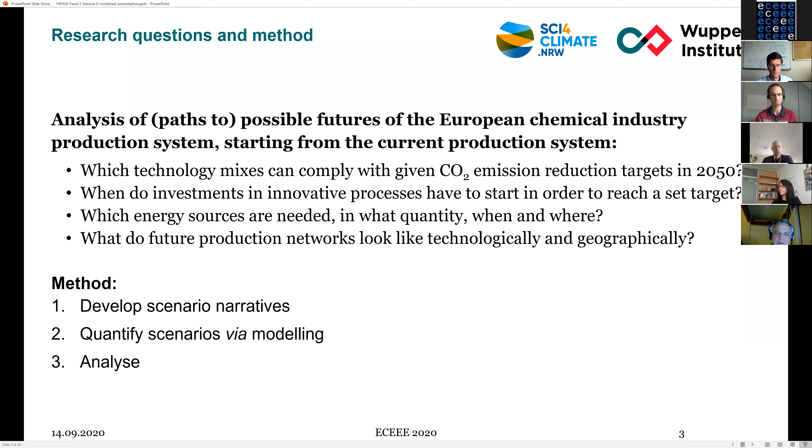So you should see my third slide now. Do you? Yes. Yeah, okay. So this is our modeling framework.

In the big box in the middle is our model, consisting of three modules. This model is fed from the left by our scenario assumptions. We develop scenario narratives with some assumptions in the paper, based on the IPCC SSP2 scenarios. We also input data from our industry database, which has a highly detailed geographical level of information on the plants in Europe, what technology they use, how old they are, their capacity, and so on. So this goes into the model.

The first module is a stock dynamics model that, based on the assumptions for the scenarios, generates the future demand for plastics and the future plastic waste generation.

This, in turn, is an input for the second module, the invest module. It's a linear optimization model that, based on future demand for plastics and the technology parameters, decides when and where to invest or retrofit technologies to meet the demand while minimizing costs, given constraints on CO2 emissions, for example.

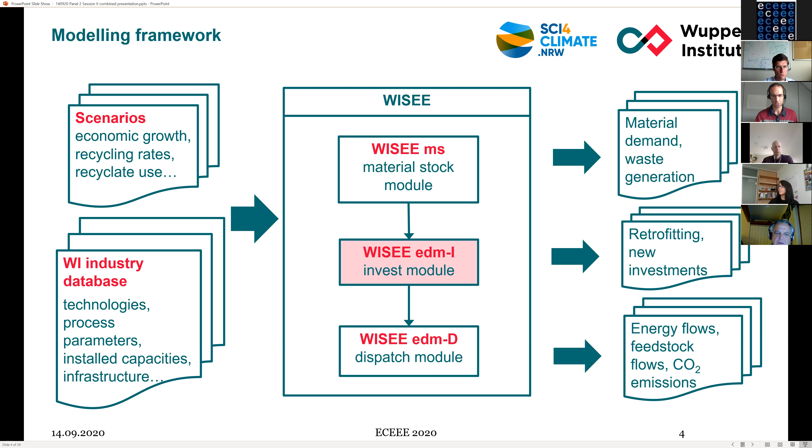The next slide, I guess you will see it before I can see it. It shows how some of the routes, the chemical production routes, are represented in the model. You still don't see the slide, I guess. We can see the HVC production route. Okay, you can see it. Okay, great, thank you.

In green on this slide, the name of the technologies and the products are the existing technologies already installed in Europe that we have in the database. From the left, the refineries produce feedstock, naphtha, that is then used in steam crackers to produce the platform chemicals, the olefins and aromatics, or you import from terminals at coastal sites naphtha, ethane, propane, and you can use them in steam crackers or in propane dehydrogenation, for instance. These kinds of routes are implemented in the model.

The red products and red technologies are future technologies that the model might decide to implement to reach carbon neutrality. Instead of importing naphtha, we might import green, climate-neutral naphtha from overseas, and then use it in steam crackers. We might use plastic waste, put it through pyrolysis, and generate naphtha, ethane, and gas oil that can also be used in steam crackers. Or we might go a totally different route with another new feedstock, methanol, from plastic waste, for instance, with gasification, and then from the syngas you produce methanol. Same thing with biomass, and then from this methanol you need a new route, the MTO, methanol to olefins, or methanol to aromatics. All of those platform chemicals then go into the polymerization to produce the polymers.

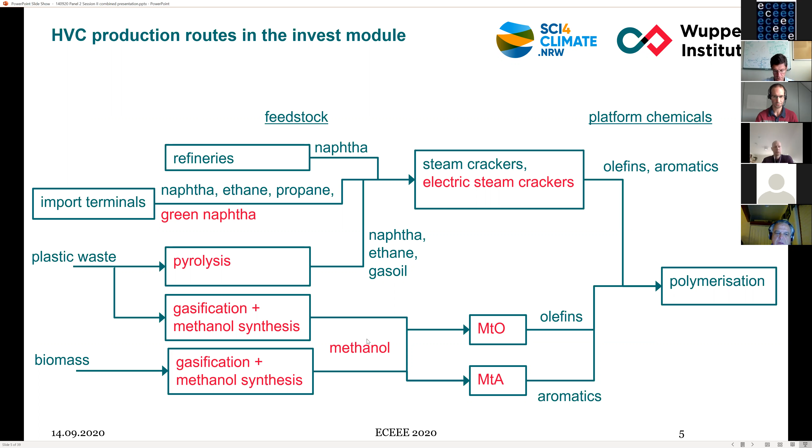So as I said, it's a geographically detailed model.

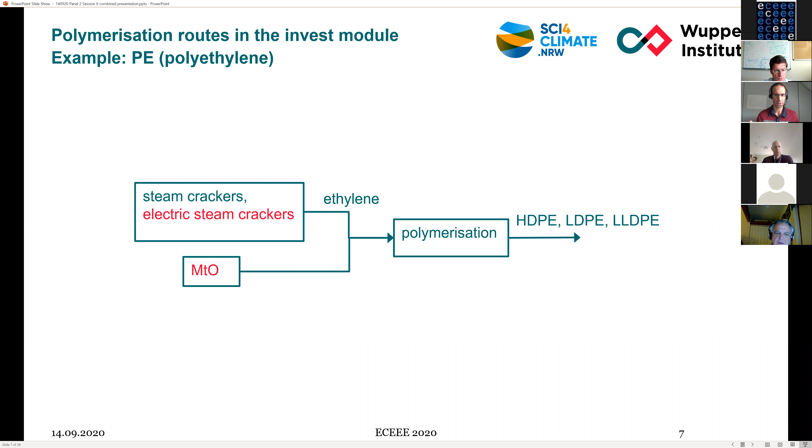Going to the next slide. So we talked about the feedstock and the platform chemicals - this is going into polymerization. The next slide is a very simple polymerization route from ethylene, one of the olefins, producing 3 types of polyethylene. That's a simple one, also implemented in the model.

We have 15 different polymers in the model, something like 57 different products, and you will see why in the next slide when it comes up. It's another polymerization route for another polymer called ABS.

So I can't see the slide yet. I don't know if you can see it, but you will see that the route is much more complicated than for polyethylene. You have a lot more intermediary steps - you need more products, intermediary products, until you get your polymer.

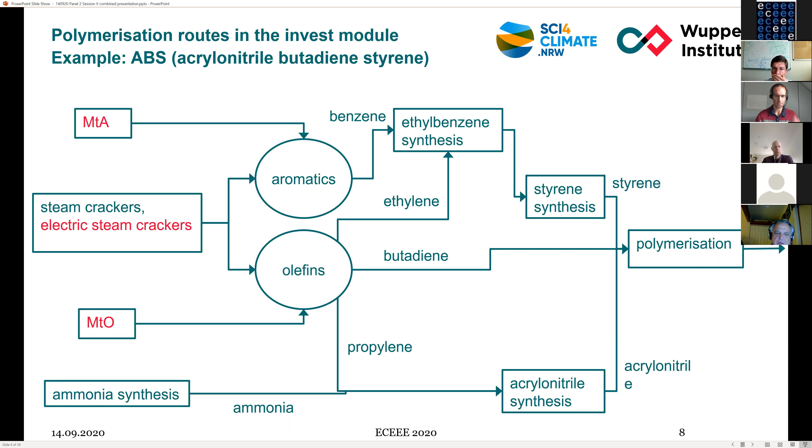And as you saw on the maps before, those different plants are not necessarily at the same place. Along this chain, you might have to transport the products from one place to the other. So that's the next feature of this model. Moving on to the next slide, it should show 4 small maps.

These are close-up looks, kind of zoomed in on the region around Rotterdam and Antwerp, and the Rhine and Ruhr region in Western Germany, around Cologne and the region where I'm sitting right now. I can't see the slide - now I can see it.

The 2 maps at the top show you the naphtha pipelines. In yellow is the capacity of the pipelines, and if the pipeline is used, it's gray. On the top left, you have in 2030, naphtha being imported from Rotterdam and flowing to Cologne, and then flowing up to the Ruhr area.

In 2050, it looks a bit different. Now you're importing green naphtha, climate neutral naphtha, from Rotterdam to Cologne also. It's not going up anymore to the Ruhr area - they changed their production processes. But now it's also flowing down towards Ludwigshafen, a bit further south in Germany.

It wasn't the case in 2030 because they had their own refinery in the region there. In 2050, the refinery is out - it's not working in a climate neutral scenario. So they import green naphtha.

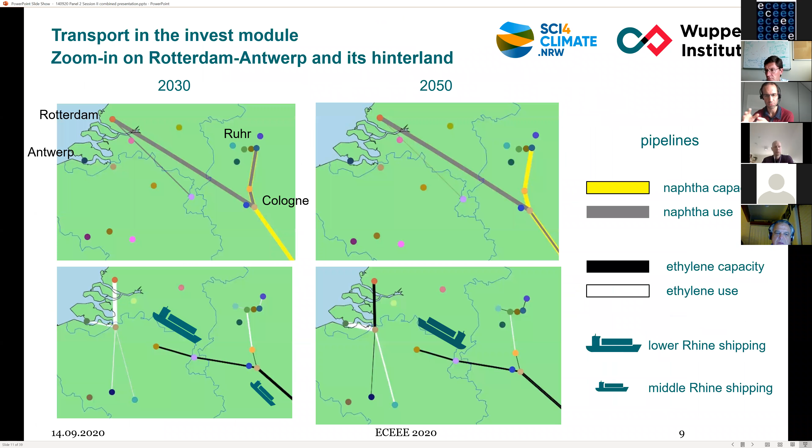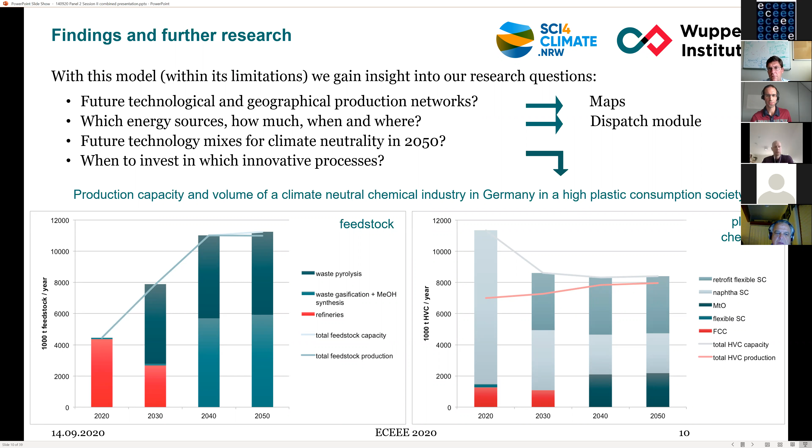So that's the kind of analysis we can do. There's more in the paper, and that was the end of the presentation. Thank you for listening.

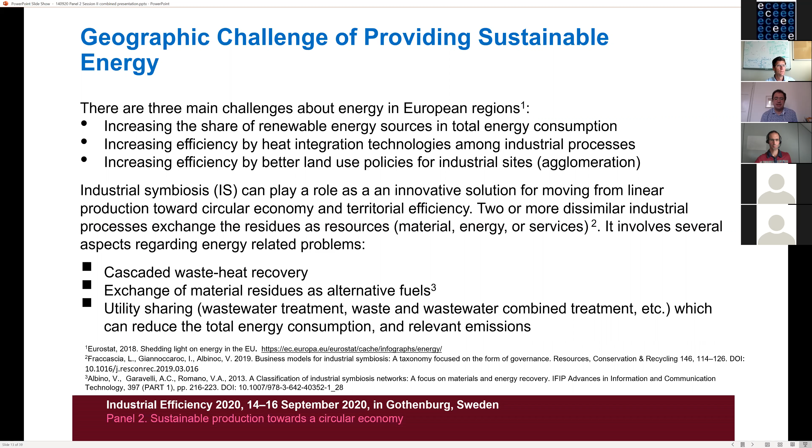But the question would be then, in which manner this work would be more effective? If it would be in individual collaborations, or if it would be scaled up into networks, let's say.

In order to have these networks, we should remember that industrial... not only, but also it's about companies from different sectors that normally don't know each other. So when we speak about scaling up, it seems that it would be more complicated for a network of many different actors. Therefore, we will need some sort of support from outside the network, which is usually referred to in literature as facilitation. The structure of this type of regional collaboration is usually referred to as ISN, or industrial symbiosis network, in order to be distinguishable from individual collaboration.

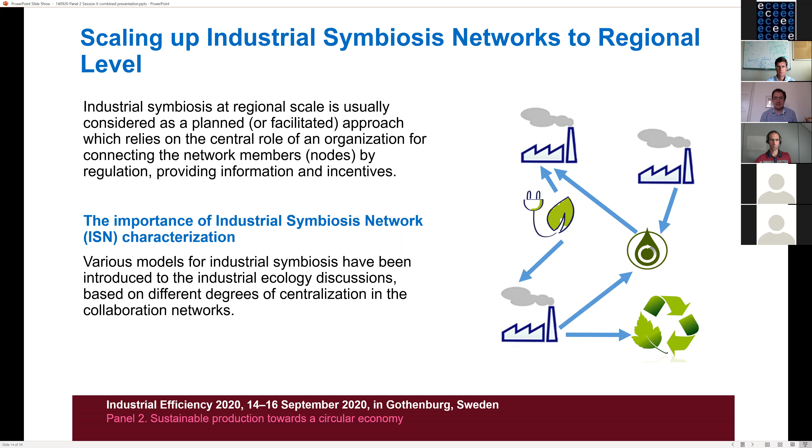At regional level, the network may also include not only manufacturing firms, but also other businesses such as waste treatment businesses or also public facilities.

This complicated structure should be somehow measured. We will need indicators not only for measuring the efficiency of a network, but also for designing future tools.

Social network analysis, as I said, this process is not only about technological aspects. For technological aspects, there are already developed tools such as input-output analysis, material flow analysis, and analysis for considering the reduction in emissions, the efficiency of network in this way. But the structure of networks, the role of different actors, different influential players in this network is also very important.

Social network analysis is a method based on graph theory, which is a quantitative method for measuring the behavior of a complicated structure, let's say a network. It's very normal to show the network as a graph with circles, which are the players or actors in the network, and the relation which is shown by lines.

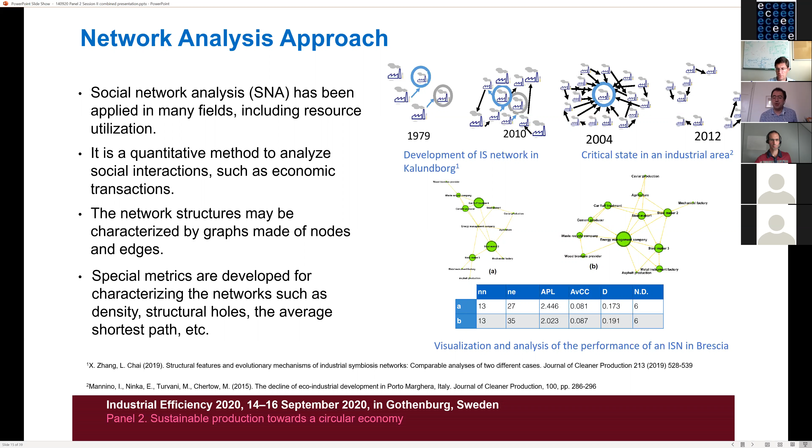Networks and the statistical data which are calculated based on this method. There are different indicators such as betweenness centrality, density, and the average shortest path, which are shown here.

For example, for density, we can see that network A has less density than network B, which is due to the fact that there is a very big influential actor in network B, which provides a shorter path, a shorter relation between the actors.

But as we saw in the image on top, there is a risk for the sustainability of the network, which is very dependent on the influential player, or central actors, which are very centralized, let's say.

For measuring this industrial symbiosis network from an internal point of view, social network analysis is a very good method, but we also need to evaluate the effect of geo-context and the behavior and efficiency of the network. Different aspects should be considered.

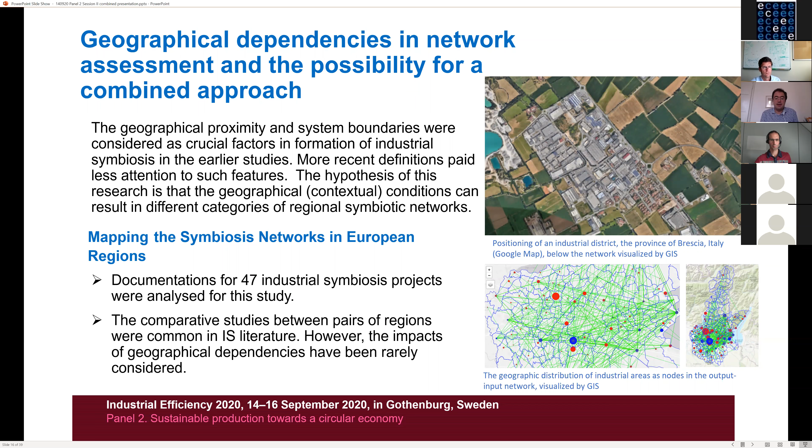They are not exactly networks at regional level, but they are large networks. Some of them even are eco-industrial parks, but scaled up and outside their boundaries.

Sorry, I'm trying to go to the next slide.

We detected three main network structures in the studied regions.

First of all, there is the centralized closed system. In case of energy, this type of network is a network with a central provider of energy or a shared utility, which is, of course, very normal in eco-industrial parks. Then we have the scattered pairs of firms.

They are individual firms in isolated regions, which through exchange of some type of waste are connected to each other in order to make a weak regional network. And finally, we have the semi-centralized, or more open system, which is the most expanded system, or let's say an image for the future ideal type of industrial symbiosis network.

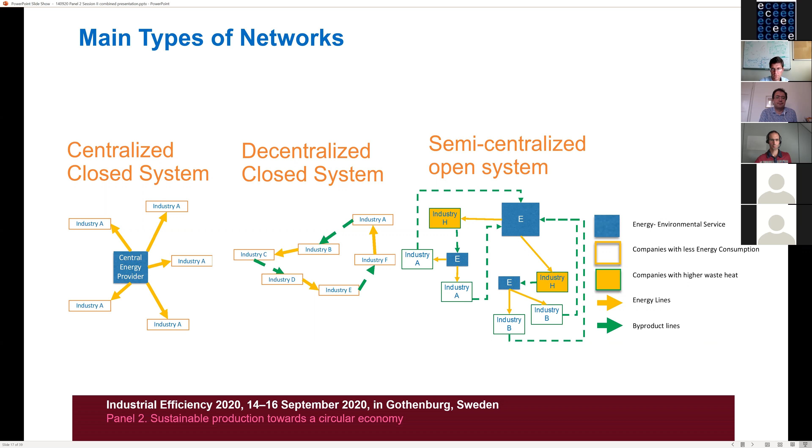This shows how these different types of networks depend on their context.

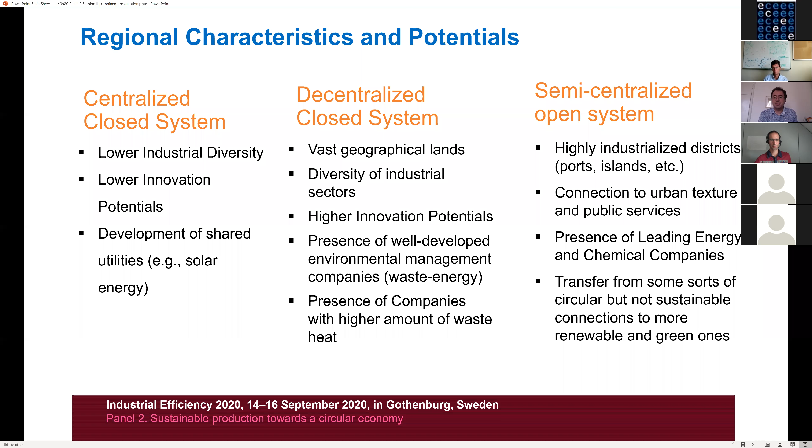However, we also found out that one of the other important characteristics which can compete with physical geography is the existence of innovation poles, or research centers, in these regions, which in some cases may lead to overcoming limitations of natural resources or contextual properties.

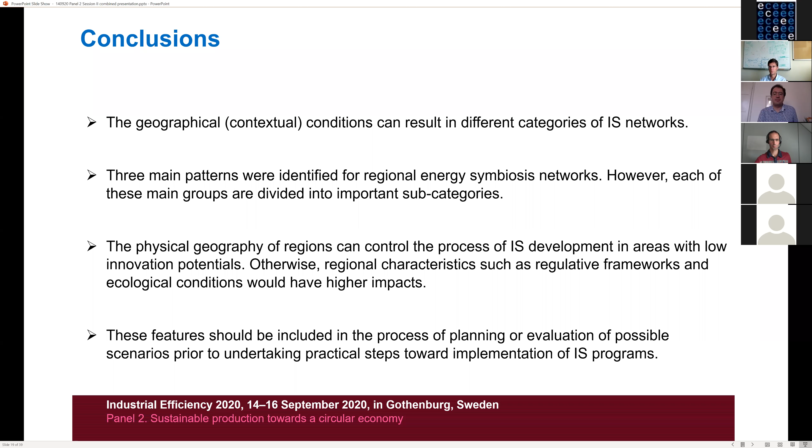The data that we used are mostly from open source data. We have detailed data from the context of Italy, and so we are open for collaborations, especially from outside Italy, to continue this study.

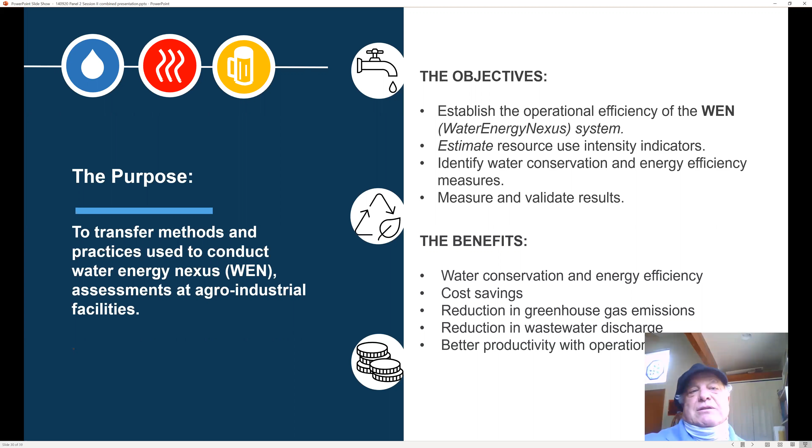The following slides will provide a description of the methods we use to conduct a materials and energy flow analysis, using engineering protocols developed by the American Society of Mechanical Engineers and the U.S. Department of Energy, providing analytical tools to conduct industrial energy system assessments.

The water energy assessment model integrates the MEF systems with these protocols in order to establish the operational efficiency of the energy assets engaged in beer production, which is our case study for today, where we analyze the steam systems, water pumps, air compressors, refrigeration systems, and fans in order to establish metrics that allow us to determine the water energy intensity of the facility and per unit operation.

These indicators provide us with baseline conditions. They allow us to identify water and energy conservation measures. They give us a foundation to calculate costs and benefits, and then allow us to compare, measure, and validate results.

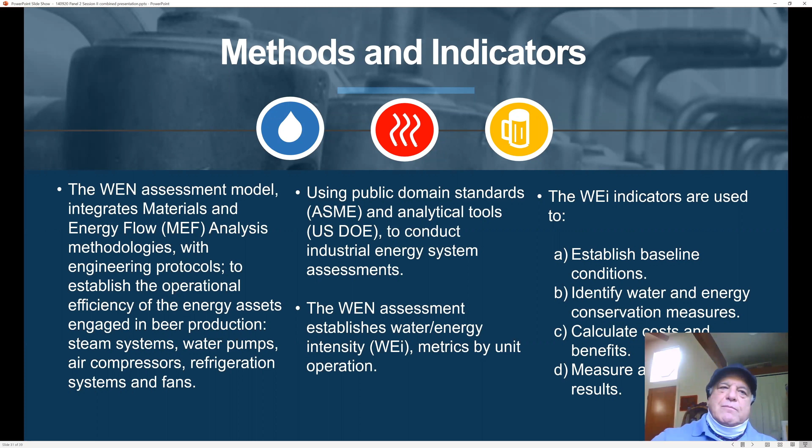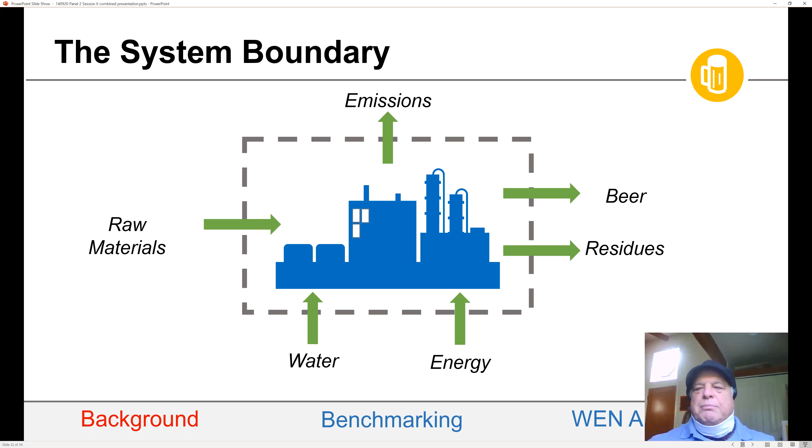The system boundary stays within the production industrial facility, where raw materials, water, and energy come in to generate beer, as a result creating residues, water, and other biomass, as well as air emissions.

We established the water and energy relationship. We identify all of the energy assets engaged in this relationship. We create a pathway to understand where water interacts with or is affected by power, both thermal and electric, to create steam that is used throughout the facility, as well as to provide heat for the process, using electricity as the power source to operate pumps, compressors, refrigeration systems, and all of that creating a flow of product with water embedded and energy embedded within that water, most of which will be packaged as beer at the end of the process.

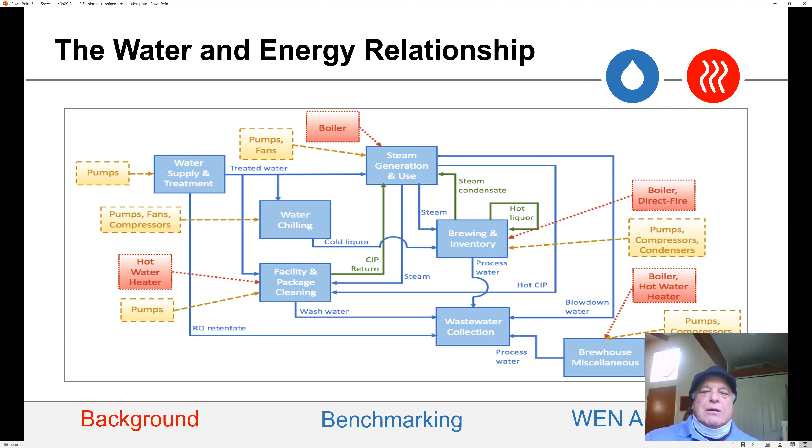I'll just give you another second to see the image. Thank you very much.

We use Sankey diagrams to illustrate the energy balance: the supply side of electricity and natural gas, and the demand side of how these energy resources are utilized, where they are utilized, in what proportions, and what are the final products within that system.

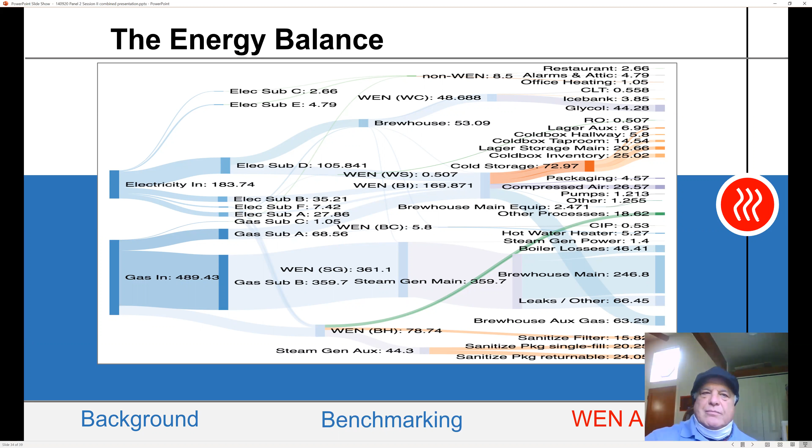Municipal water is delivered to feed the brewing facility with the most essential resource, in order to create steam and to provide fresh water for multiple purposes distributed throughout the brewing facility, such that this diagram gives us a visual illustration of how much water is being used, where it is being used, and what is the final outcome of that water utilized for beer production.

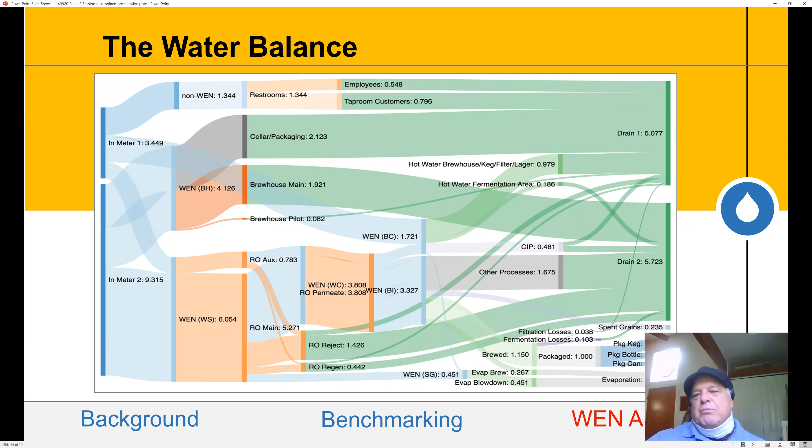Resource intensity metrics are foundational for us to grasp what is happening in the facility, where we can see the water intensity, the energy intensity, as well as the combined water energy intensity that allows us to measure the amount of energy consumed per barrel of water that passes through the brewery, giving us insight into this relationship that is clear, consistent, and can be replicated over time in order to assess where we have opportunities to reduce intensity and achieve optimization of resource consumption.

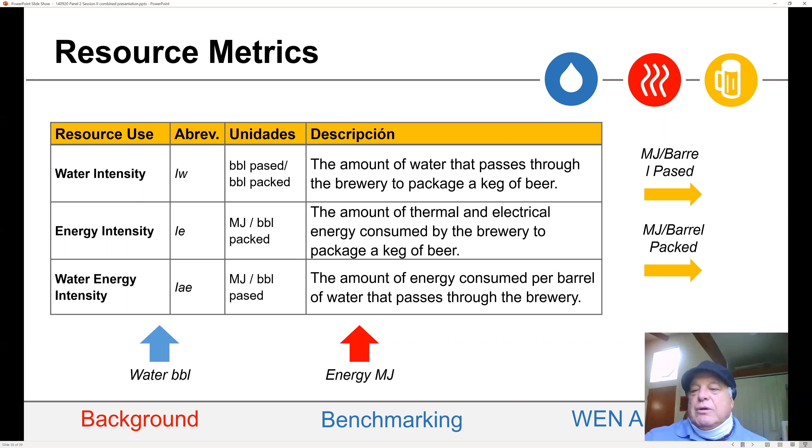This table provides very specific results by unit operation. We label them WEN points, water energy nexus points, throughout the facility, where we can see the amount of water that was passed and the specific energy that is consumed. We can calculate the intensity of this relationship. We can understand where resources are used within the water energy nexus system and outside of it, so that we have a full, complete picture of the facility, and with it create a map that allows us to target specific areas within the facility where we can see opportunities to increase efficiency and reduce waste.

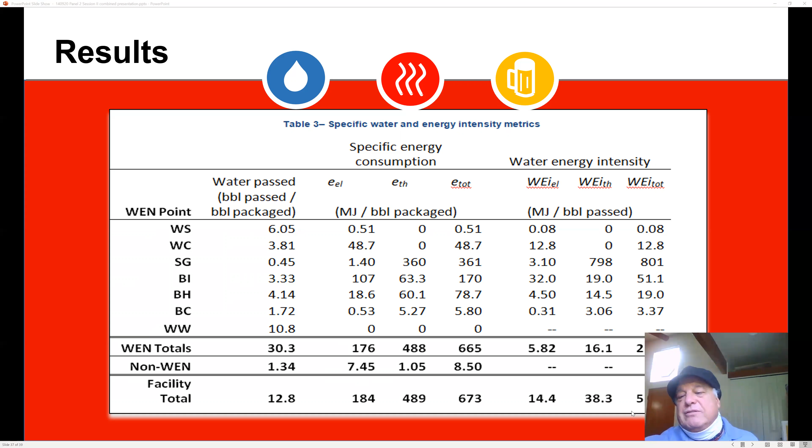The ultimate goal of conducting water energy nexus assessments is obviously to identify resource conservation measures. We know that any reduction in specific consumption will result in cost savings. We are also interested in identifying water conservation opportunities where there is embedded energy, reducing specific energy consumption and allowing those cost savings to accumulate.

Reducing water losses in areas of high energy intensity is also going to reduce the demand for thermal and electric energy, both of which can provide direct and indirect greenhouse gas emission reductions. It also allows energy utility companies to target water conservation measures with embedded energy as part of their efficiency programs.

These high water-energy intensity areas can be prioritized, and then we can increase resource efficiency and reduce cost. Yes, there's always going to be high water consumption with less energy intensity that can also be optimized to reduce the volumes of wastewater that have downstream energy implications as well.

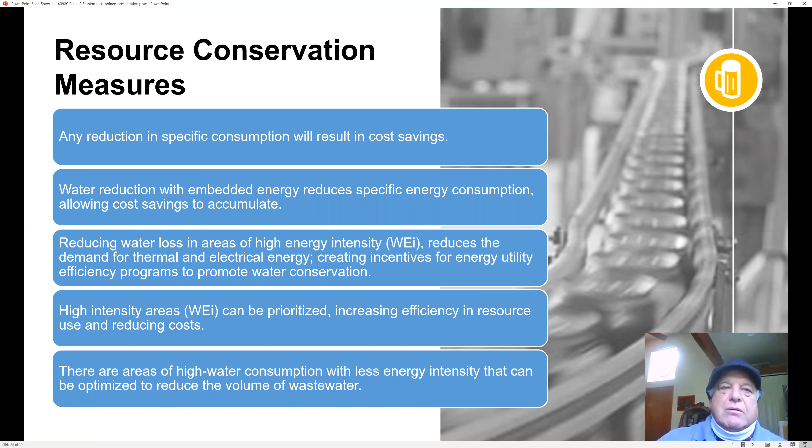So we have modeled the brewery. We have analyzed the water energy nexus to establish the amount of energy that is embedded in the water that is packaged in the barrels of beer that are produced. It's as clear a metric as we need in order to properly compare the resource use efficiency of this facility against other facilities over time.

The WEN model gives us high resolution details, offering us tactical options to identify resource conservation opportunities, providing us with operational water energy intensity metrics that give us benchmarks to identify inefficiencies, calculate conservation options, validate results, and compare against peers. We believe that these methods are very practical, they are scale neutral, they can be adopted across the board

where there is any kind of industrial water energy relationship. In the food industry, obviously water and energy are essential to produce what needs to be done in order to deliver goods and services.